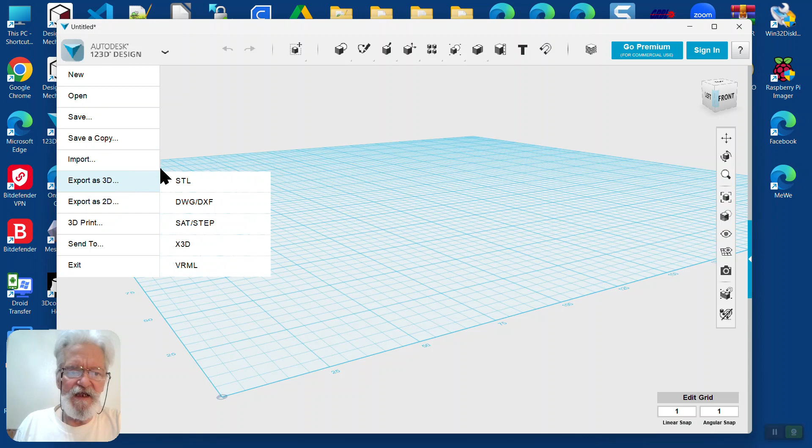Now we're going to open up another tool that I used to use all the time before I found DesignSpark Mechanical, called 123D Design. It was originally put out by Autodesk, but it's now discontinued. So we're going to open that up. And we're going to tell it we want to start a new project. And then we're going to go up here to the menu and say import an SVG file as a sketch. So we're going to select our drawing 1 file and open that up and tell it it came from Inkscape, and click OK.

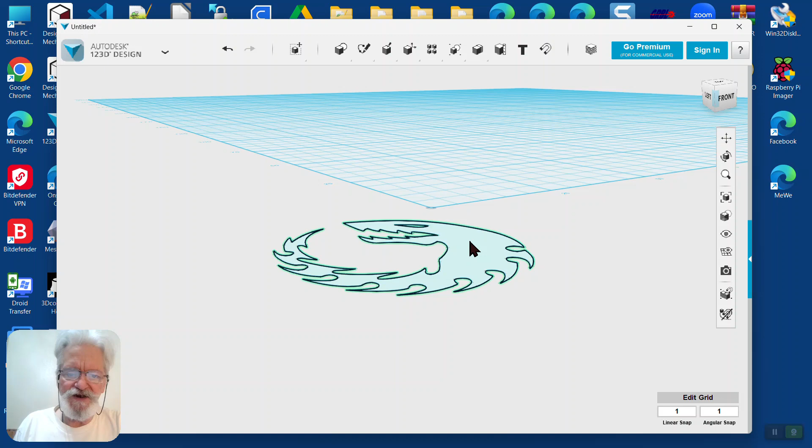And now we have an SVG file that is silhouetted on the workspace. So we want to just highlight that, and then we're going to go down here to the tools, and we're just going to extrude that up a little bit. So we're going to set it. We just want one layer. We don't need a whole lot. So we're going to say 0.2 millimeters. And there you can see it has extruded it just very slightly.

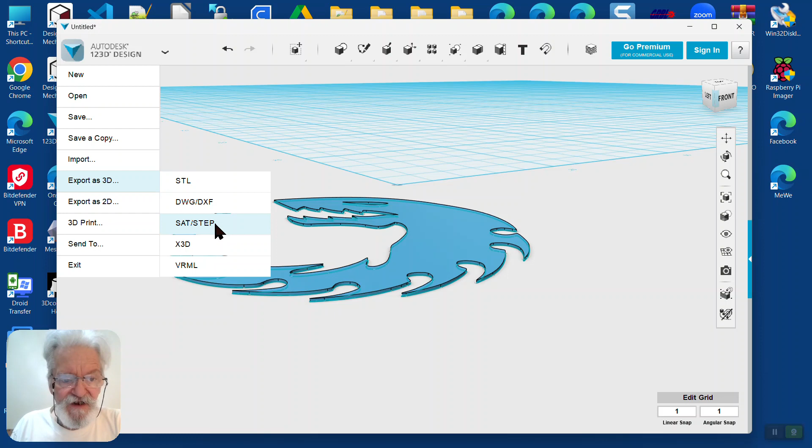And now we're going to save this out as a step file. So we're going to say export as 3D to a step file. We do not want an STL file. We could use it in DesignSpark, but the problem is if you import an STL file into DesignSpark and then you decide you want to convert that to solid, it creates all kinds of geometry that takes DesignSpark a very long time to process. But if you convert it to a step file, it works just fine. It's very quick. So we're going to convert it to a step file, select the step file, and we're going to call this drawing 1.

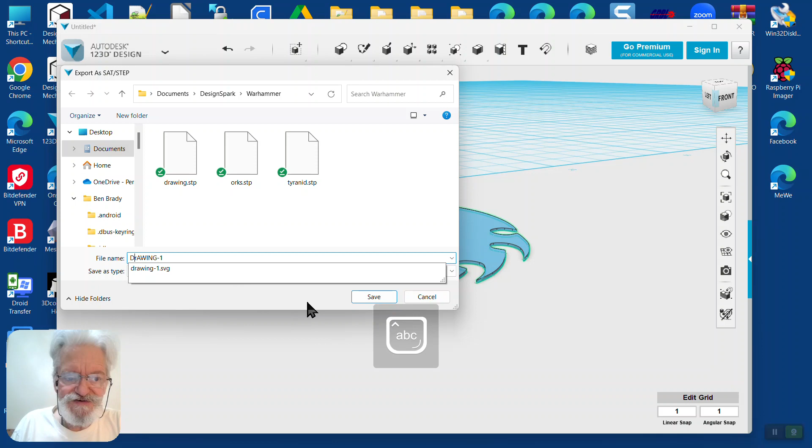And we had caps lock on the file name, so we might as well just go ahead and capitalize the D, since the caps lock key is always in the way. So we're going to save that, and now we can close 123D Design. So we're going to close that. We don't need to save it. You can save it if you'd like.

And then next we're going to open up DesignSpark Mechanical. So we're going to go up here to DesignSpark, open that up. This will take a few seconds to open. It has to communicate out to the internet to make sure that we have a valid license. Now I'm using the Creator subscription, but this should work just fine with the free DesignSpark Mechanical product because we don't need to edit the step file. All we need to do is use it in the drawing.

So we're going to go ahead and close that window. We're going to go up here to File, New Design, and let's give it a name. Tyranid.

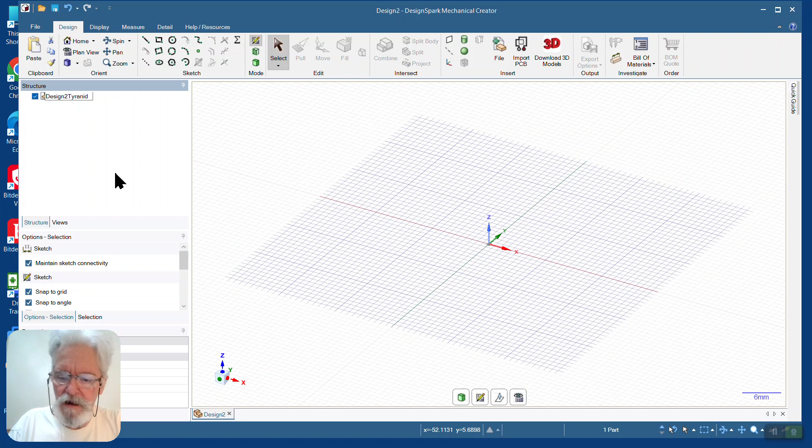And then we're going to go ahead and import the step file. So we're going to go down here, choose step. We've got drawing 1. Open that, and it's going to pull that step file into DesignSpark Mechanical. So now we have the Tyranid file there.

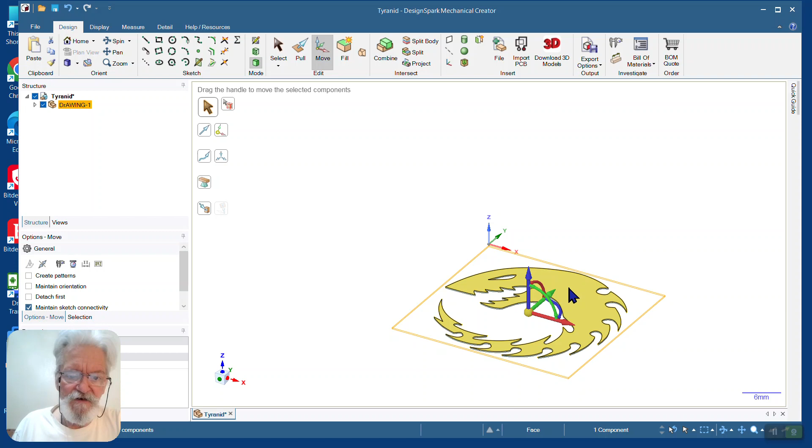And if you have a Creator or higher subscription, we could modify this step file right in DesignSpark. We could make it thicker, we could change any of the geometry, but we don't need to do that right now. We just want to be able to use that file to emboss or deboss that drawing into our DesignSpark design.

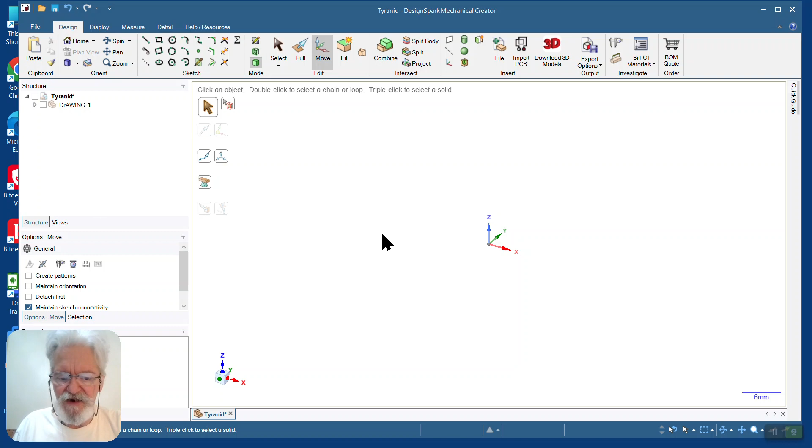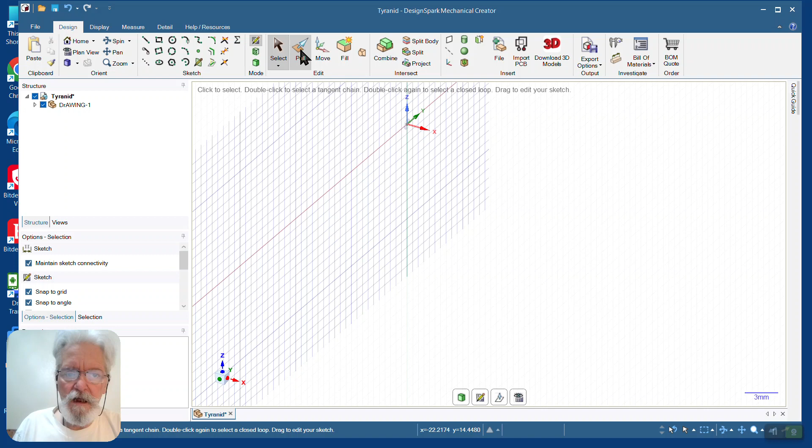So we're going to turn that off for a moment so that we don't see it, and then we're going to go into sketch mode, and then we're going to select the plan view. Let's turn this on here for a second. So we're going to go into the sketch mode, go into plan view. Now we can turn off the step file.

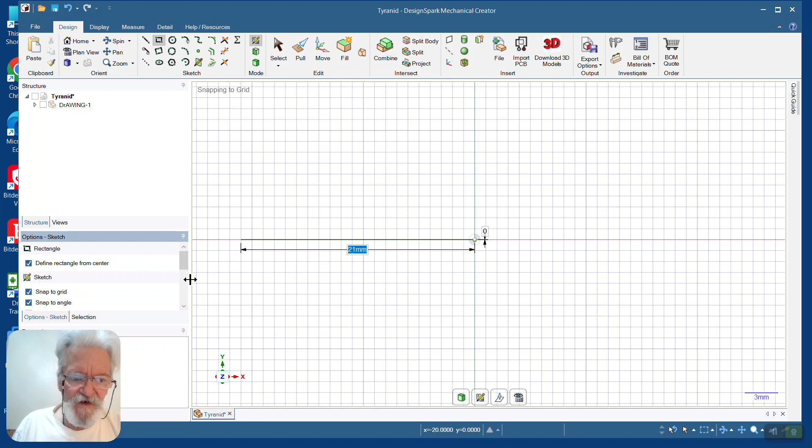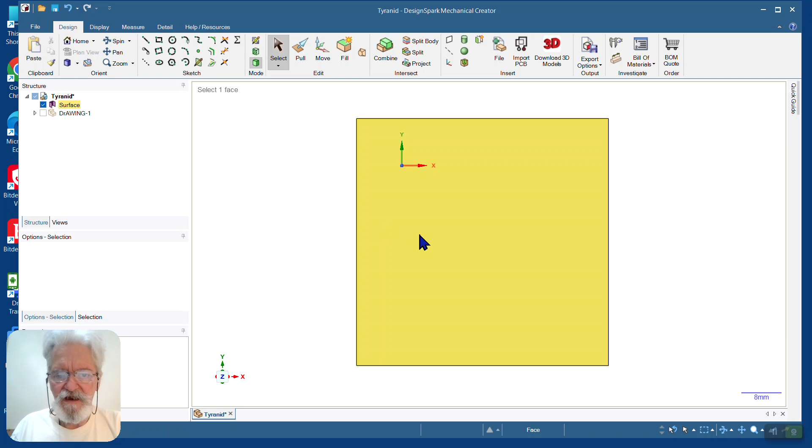And we're just going to go ahead and make a rectangle. And we want to tell it to define it from the center. So now we want to go 50 by 50. And then we can finalize that sketch. Now we're in design mode, and we're going to go ahead and pull that.

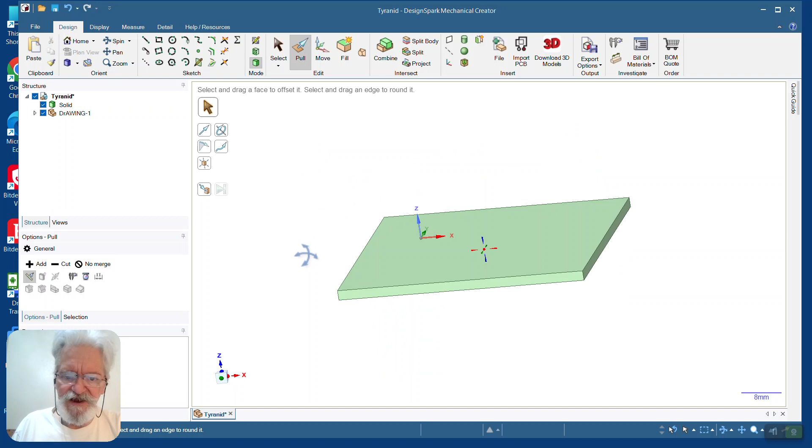So let's say we're going to make it 2 millimeters thick. We don't need to make it very thick. So now we can turn the drawing back on, and right now the drawing is underneath the rectangle that we just made. So we can go ahead and move that. We can go up here to move, and we can just pull it up to where we can see it and use it.

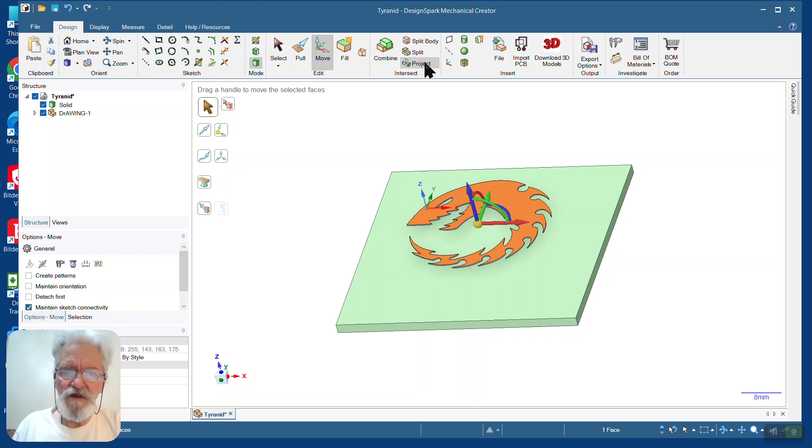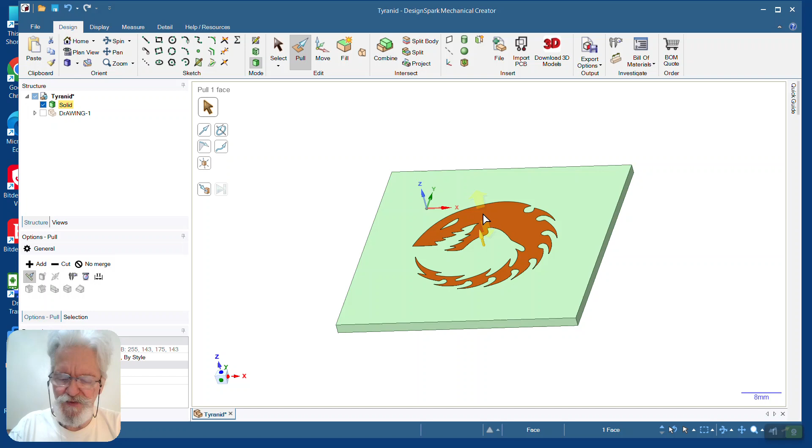So now we want to take this drawing and project it onto the face of the rectangle that we just made. So we're going to say project, and you can see it has projected onto the surface. We'll accept that projection, and now we can turn off the drawing, and now we can just select that, and then we can pull it or push it. So let's go ahead and push it. So we're going to say -1 millimeter.

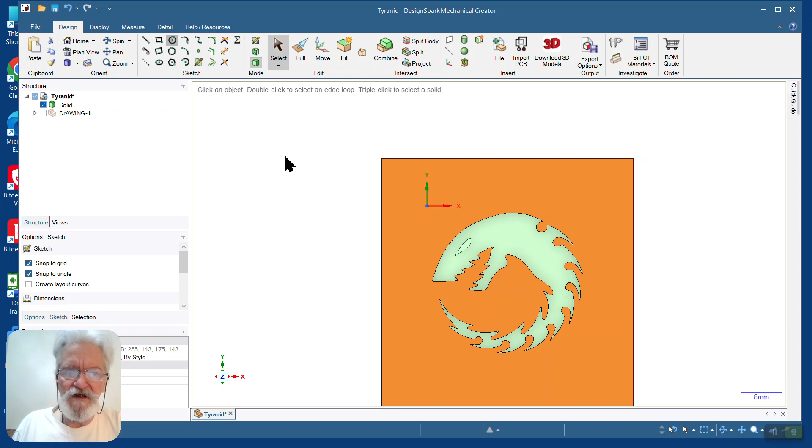And so now you can see you have a 1 millimeter deboss into the rectangle that we created in DesignSpark. And so, just for the heck of it, let's go back to plan mode and go back to the drawing mode, and let's create a hole. So we'll say 3 millimeters, and we're going to cut this. So we'll tip it back a little bit, and we're just going to make a hole. And now we have a hole for a key ring to go into.

And at this point, we can save the file. We actually don't even need to save the drawing in the file anymore. We can go ahead and delete that. And so now we have our Tyranid keychain. And now we can go ahead and save it out. And then we can export our STL so that we can send it to our 3D printer.

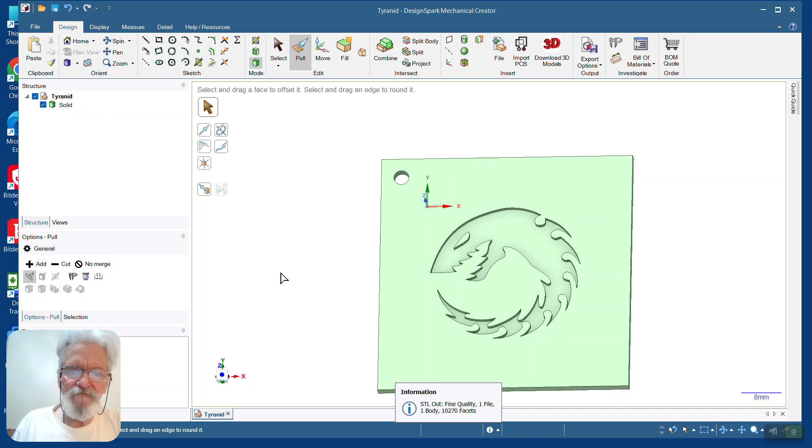So we're going to have Tyranid. And do we want to replace it? No, we're going to rename it to Tyranid keychain. And then we can save it. And then we can close DesignSpark. And that is the end of the tutorial.

Now you can use this method for doing all kinds of drawings. I've tried it with all kinds of different SVG drawings, and as long as you load it into 123D Design and save it out as a step file, then you're good to go.

In DesignSpark, if you convert that drawing into an STL file, and then you tell DesignSpark to make that STL file a solid, then it creates a bunch of geometry using the triangles, and it takes a very long time for DesignSpark to really process anything. I've seen it take as long as 2 hours on my laptop here, which is an Intel i5 laptop. So the best thing to do is just use a step file, and then DesignSpark will handle it just fine.